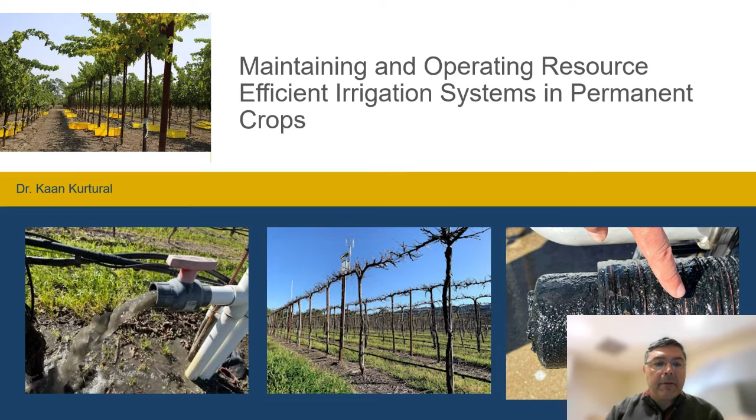Morning. Today I wanted to talk a little bit about maintaining and operating resource efficient vineyards. It is a maintenance issue that's often overlooked, and it can provide a lot of savings to the grower as well as maintaining the yields in any season.

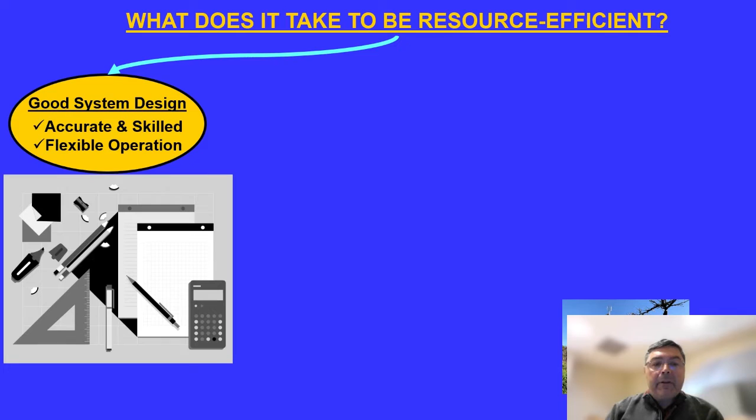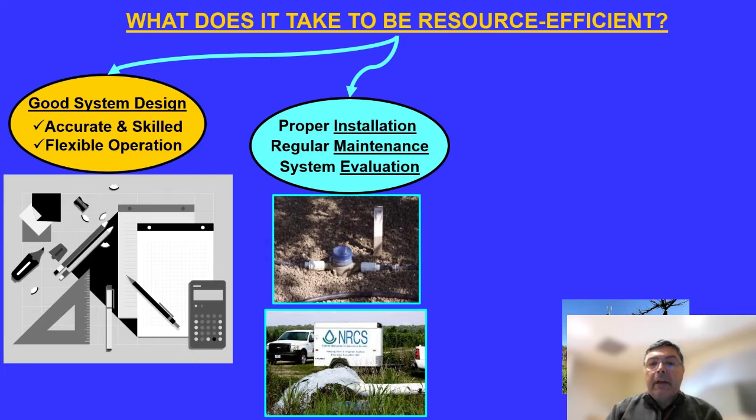So, what does it take to be resource efficient? It starts with a good system design, of course. You need an accurate and skilled person designing this system that will allow for a flexible operation. The system has to be properly installed, regularly maintained and evaluated.

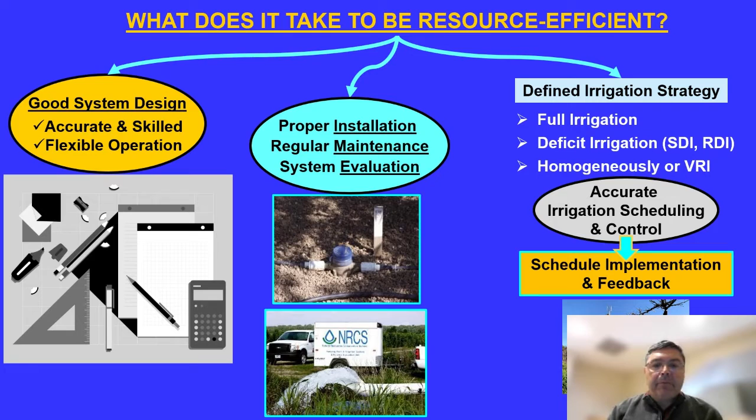You also need input from the grower regarding irrigation strategy, such as deciding to do full replacement or deficit irrigation, sustained deficit or regulated deficit, or irrigating the vineyard or orchard homogeneously versus using variable rate irrigation. This requires accurate irrigation scheduling and control, with schedule and implementation feedback, which we can explain at a later date.

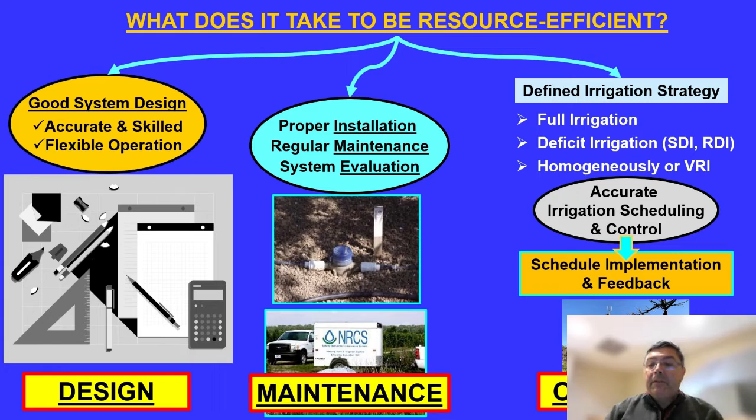So you have to have these components together: design, maintenance, as well as operations in our case.

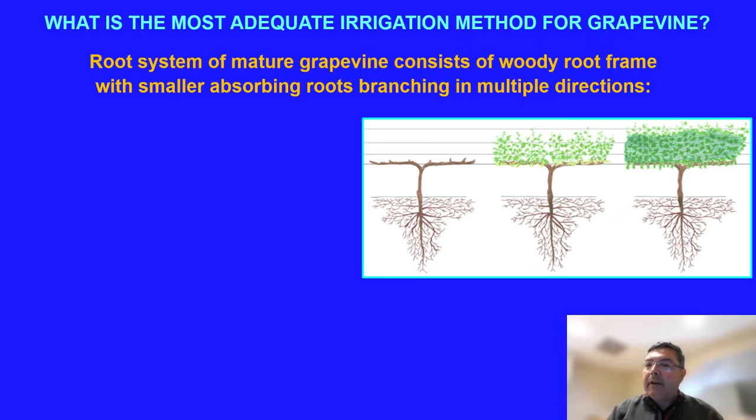So, what is the most adequate irrigation method for the grapevine, since that's mostly what I work with? You have to irrigate the vine by delivering water to the ground. The root system of the mature grapevine consists of a woody root frame with smaller absorbing roots branching in multiple directions, but rootstocks might affect that.

These roots will mine the soil horizontally and deeply. Vineyards thrive in soils with a good balance between water and air. We do not want saturated soils. Vineyards also do not enjoy soil compaction or wet-dry cycles.

We use low volume irrigation systems hand in hand with careful management and timing of amounts of irrigation and fertilizer.

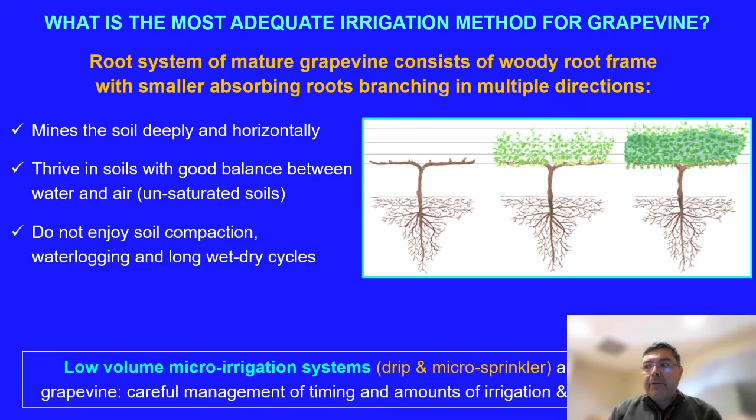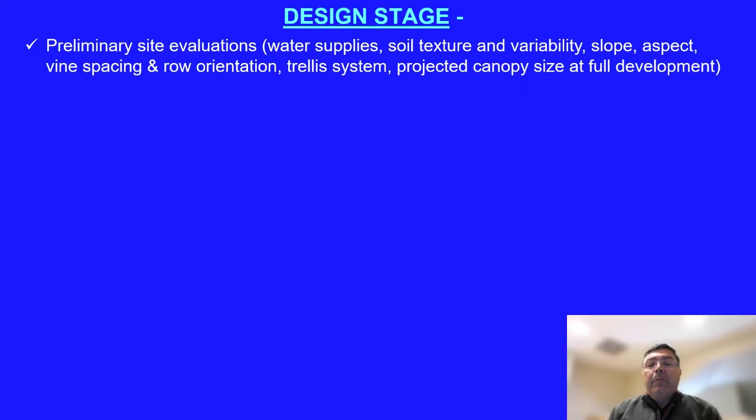Now, projected canopy size at full development, and what kind of water will you be delivering? Once you have these variables, you can define the water application rate in inches per hour and maximum irrigation depth in inches, based on soil properties such as infiltration rate and water holding capacity, and most importantly, crop evapotranspiration.

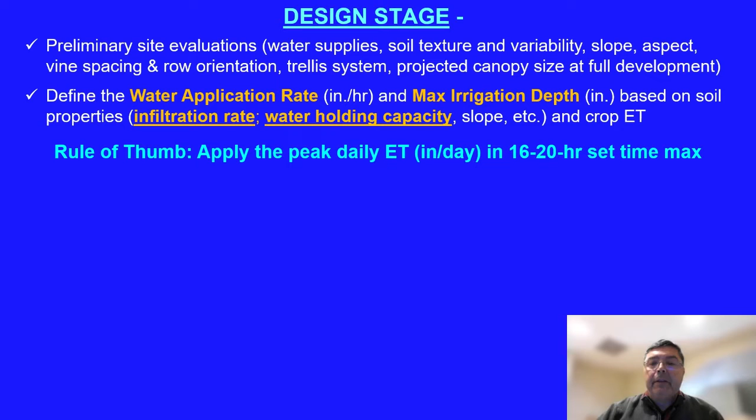The rule of thumb is to apply peak daily evapotranspiration, which is in inches per day, in a 16 to 20 hour set time maximum.

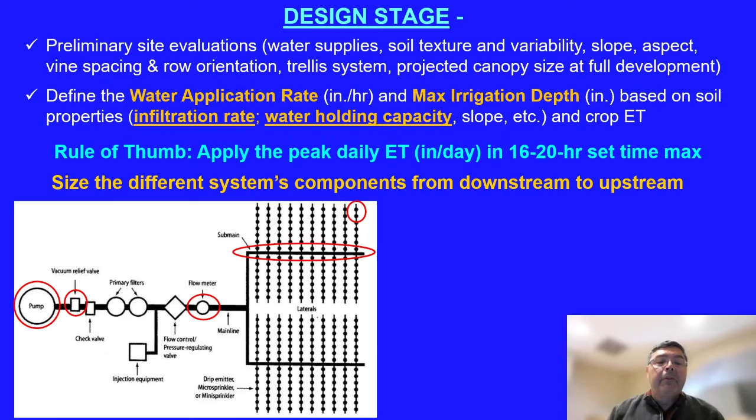We design these systems from downstream to upstream. For example, from the emitter by the vines to the submain, to the laterals, to the main line, flow meter, injection equipment, primary filters, and all the way back to the pump.

You also need to calculate the flow and friction losses along the pipe system, and size the various parts' capacity to ensure routine and maximum system load.

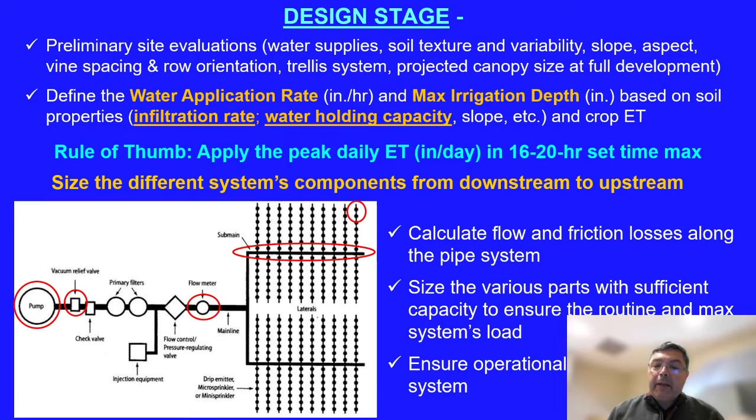You need to make sure you're able to irrigate this vineyard from the time you plant it to the time you're pulling a lot of yield. So you need to have some sort of flexibility in operating the system.

You will have a range of operating conditions, and you need to be able to adjust the operation to various system loads. During its lifetime, it will be operated under different conditions. Young vines are quite different, and these needs will increase with time, along with the quantity and pressure required.

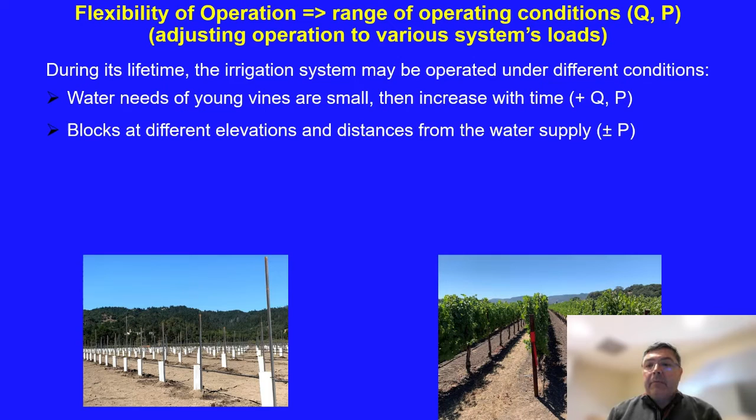You might also have different elevations and distances from the water supply, so you need to be able to vary the pressure delivered to different portions of your vineyard, and blocks with different emitters. There might be soil differences, so the quantity delivered to every block might differ, as well as the pressure.

More often than not, we see different composite systems with different flow rates and pressures. Sometimes people have drip and micro sprinklers in blocks right next to each other. You might have single lines or dual lines, alternating versus solid irrigation sets, etc. All these things factor into the flexibility of operations of an irrigation system in a vineyard.

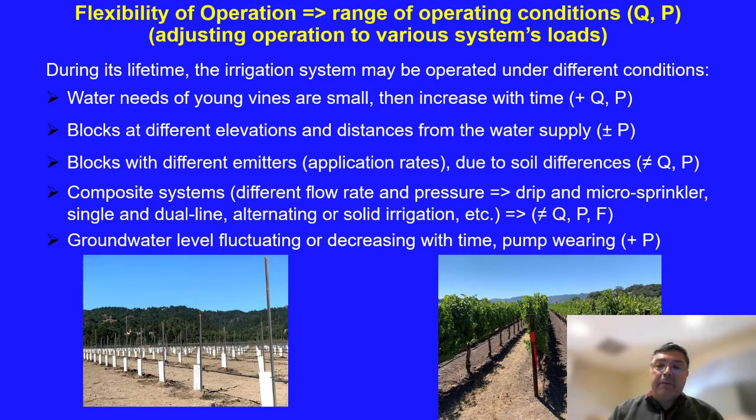Nobody's immune to it. Groundwater levels fluctuate and they might decrease with time. And as these deplete, the pumps start wearing out, so the pressure of the system has to be managed, or the pump needs to be maintained.

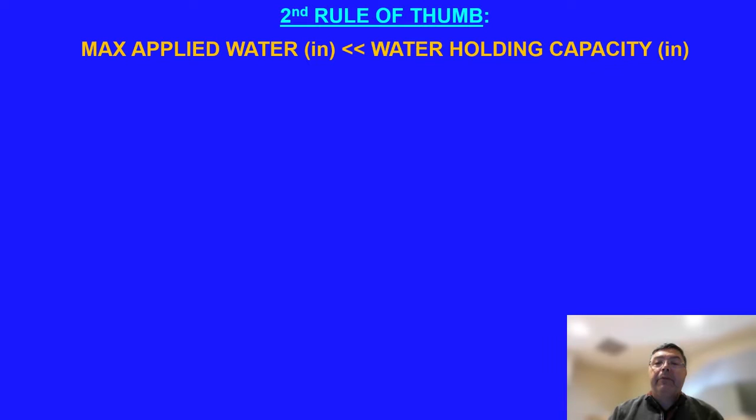The second rule of thumb when setting up these irrigation systems for resource efficiency: the maximum amount of water you apply in inches has to be less than the water holding capacity of the soil. Although with micro irrigation, we might be tempted to micro flood these vineyards.

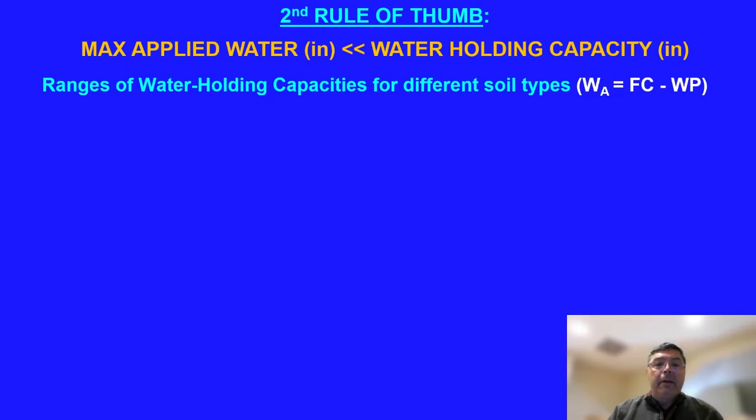Be careful or cognizant of the water holding capacities for different soil types. Usually this is the difference between the field capacity and the wilting point that we might set for these different soil types. Here's an idealized table of water holding capacities in inches per foot.

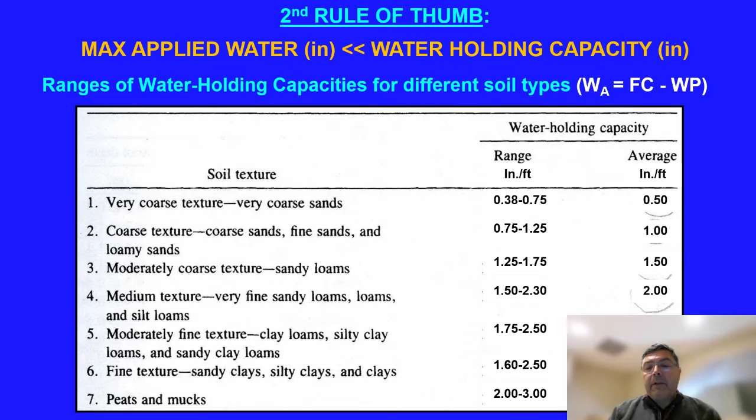You can go from very coarse sands to peat mucks. Most of our vineyards are in medium texture to moderately coarse texture soils, so our average water holding capacity is going to be about 1.5 to 2 inches per foot.

One thing I must point out is that soil electrical conductivity, which can be measured proximally, is directly related to texture and water content, and you can relate this spatially over large acreages. This work we did years back identified that water content measured with proximal sensing over long distances and areas really reflects the texture of the soils.

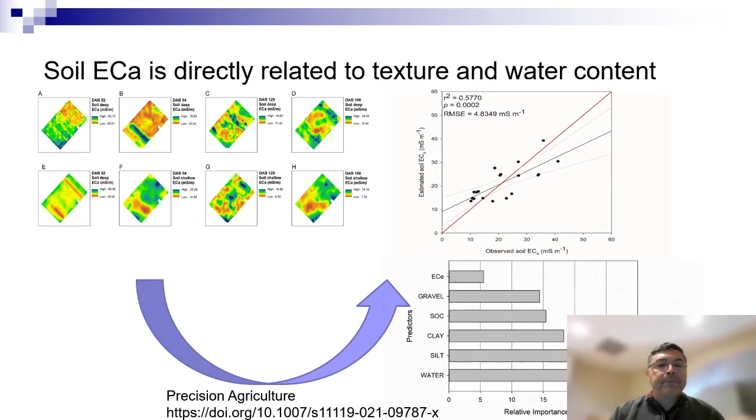After that you need to calculate some kind of maximum water depth for your irrigation. This is usually based on evapotranspiration. Different systems of irrigation can be put up: surface irrigation, sprinkler, micro sprinkler, and finally drip irrigation.

The efficiency of irrigation varies between 85 to 95%. When calculating maximum water depth of irrigation, we usually take the maximum daily ET multiplied by irrigation frequency and divide by the efficiency of application.

In this example, we looked at a 3-day period where we had roughly about 0.6 inches over the course of the 3 days, divided by the efficiency of 85%. This resulted in about 0.7 inches that has to be delivered in less than 24 hours in our specific case.

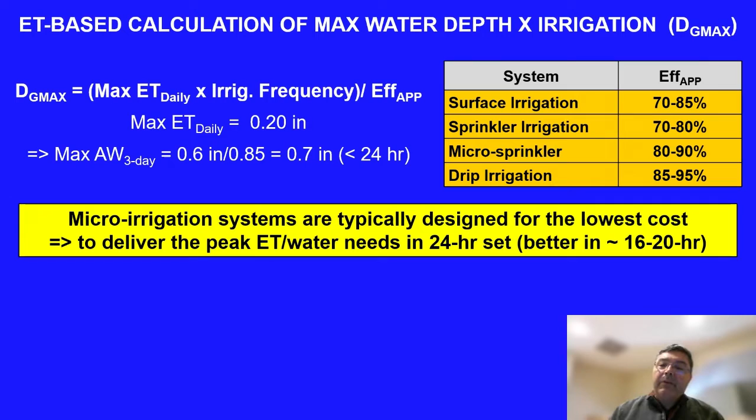Micro-irrigation systems, such as the systems we use in our vineyards, are usually designed for the lowest cost, and at this lowest cost they have to deliver the peak evapotranspiration water needs in a 24-hour set. But it's better if the system can deliver this in a 16 to 20-hour set.

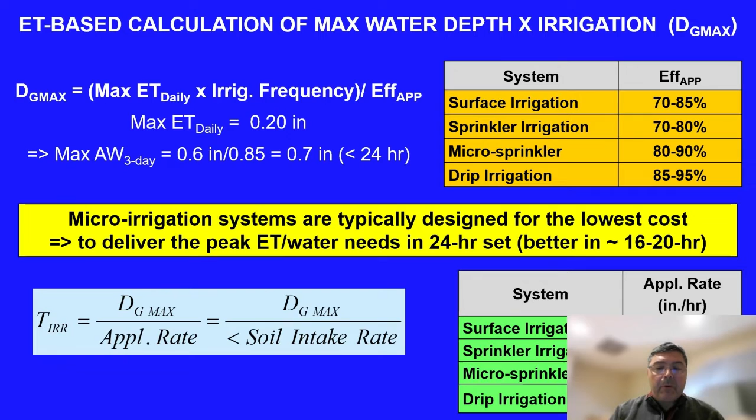Looking at this, you have different systems with different application rates in inches per hour. If you look at drip irrigation, they're delivering quite a low rate, so it can be a steady stream of water at a low rate coming into the vineyard.

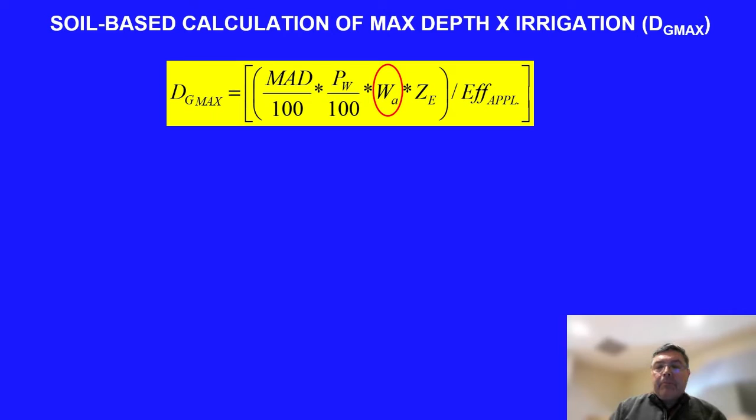So you have to match this to the soil-based calculation of maximum irrigation depth. The maximum depth of water to apply per irrigation is going to be related to the water holding capacity of the soil, the percent wetted area with the system you have in place, and the efficiency of application. The formula might look long, but it's quite straightforward.

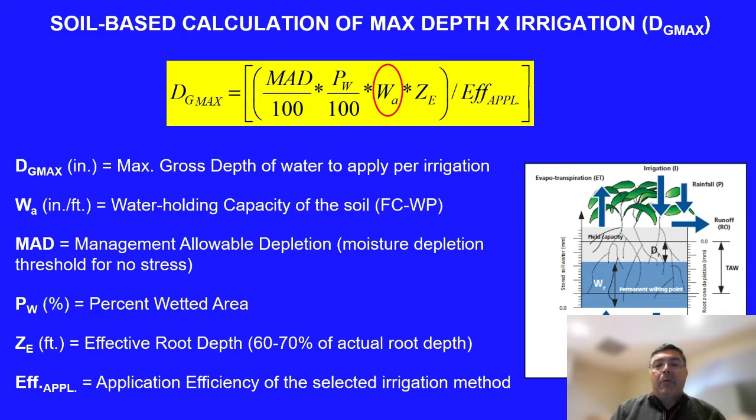Management allowable depletion for this type of soil, we set at 50%, so 0.8 inches per foot. Then the maximum irrigation depth to apply is calculated with the variables filled in, and you can also convert this to gallons per plant as a volume using the formula DG max multiplied by the spacing, 5 by 6, multiplied by the constant 0.623.

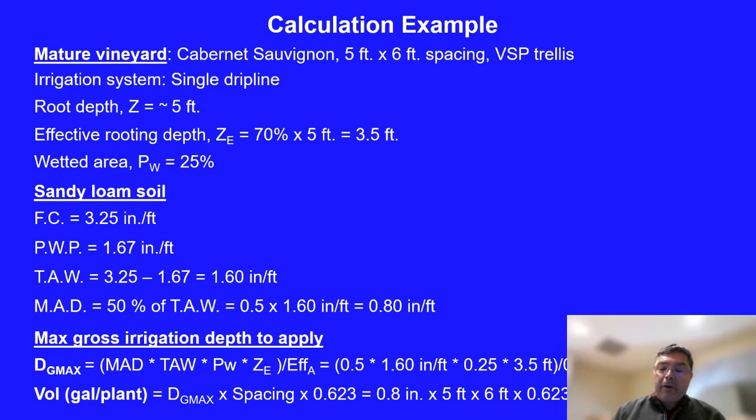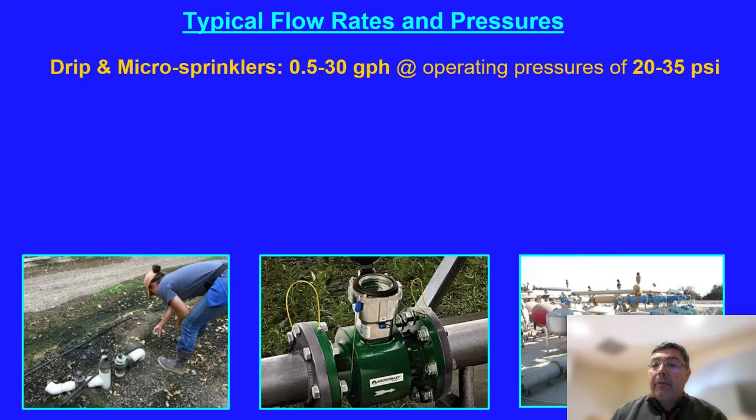When operating these systems, you have to be cognizant of the typical flow rates and pressures. Drip and micro sprinklers deliver anywhere between 0.5 to 30 gallons per hour, with operating pressures between 20 to 35 psi. Micro irrigation emitters might require 7 to 12 psi.

These are the emitters you have in the vineyards. Of course, any irrigation system will have a filtering system. Filters are a critical component of the irrigation system, and they will require an additional 15 to 25 psi. If you're using a back-flushing type filter, up to 35 psi for them to operate.

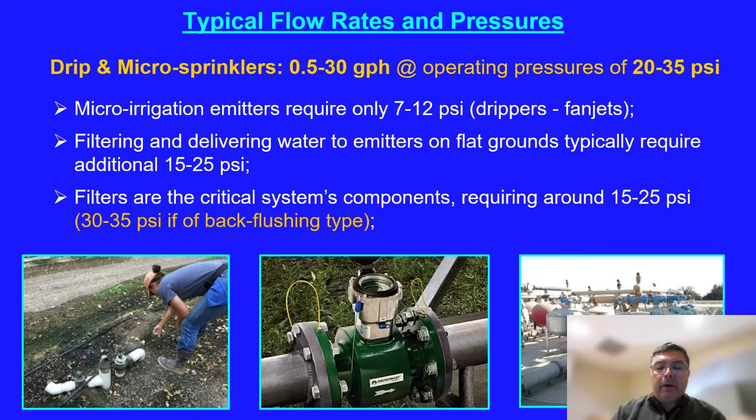As you will see here, the flow meter, pressure regulator, and I cannot emphasize enough the importance of having a flow meter at least at one point in the system.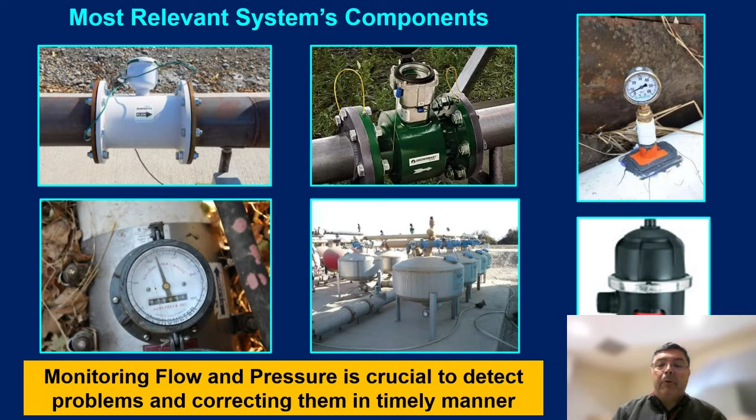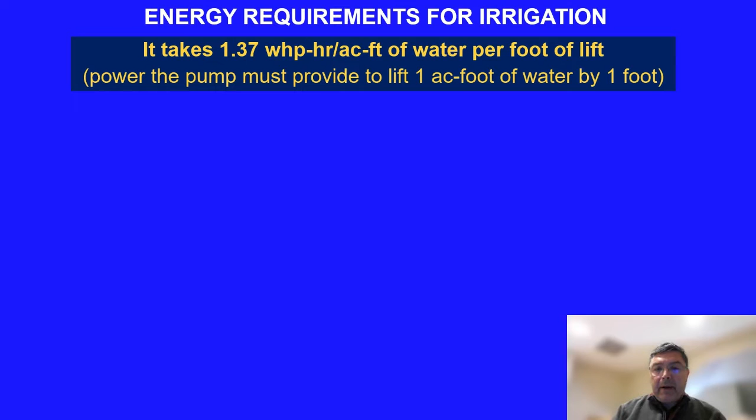There are energy requirements for irrigation. It'll take about 1.37 water horsepower hours per acre foot that the pump must provide to lift 1 acre foot of water by 1 foot. Various fuel sources, electricity, natural gas, diesel, and propane, and the pump output, they will have different energy requirements. The sources of energy also provide different energy units to lift the water. But electricity, it'll take about 1.55 kilowatt hours per acre foot per foot.

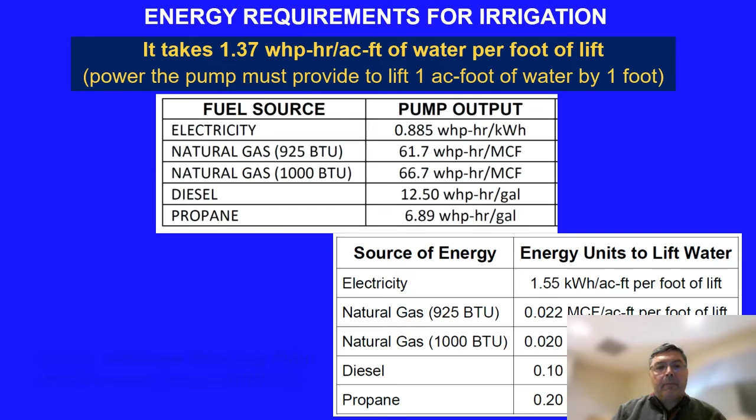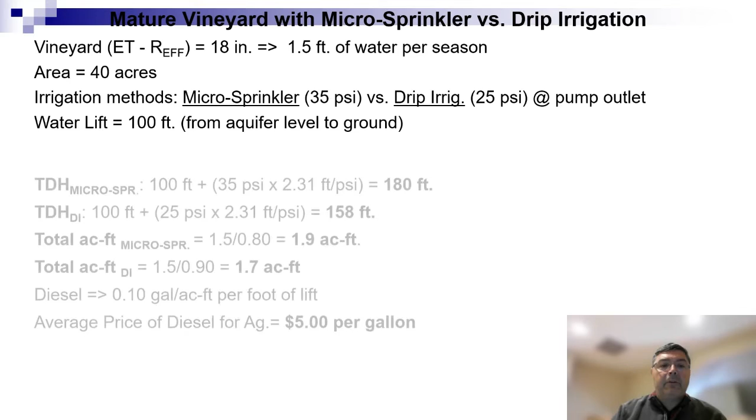A mature vineyard with a micro sprinkler versus drip irrigation. In this case, the vineyard was using about 1.5 foot of water per season on a 40-acre set. We compared irrigation methods of micro sprinkler versus drip irrigation, 35 versus 25 psi at the pump outlet. The water lifted 100 feet from aquifer level to ground. Looking at this, total dynamic head changes with micro sprinkler or drip irrigation. Micro sprinkler requires a higher psi compared to drip irrigation. Total dynamic head is 180 feet versus 158, with a micro sprinkler about 1.9 acre feet versus 1.7 acre feet with drip irrigation.

If you're using diesel to pump this water out, at 1/10 of a gallon per acre foot per foot of lift, assuming an average price of diesel at about $5 a gallon, it's quite substantial for a micro sprinkler. But if you were to change this to drip irrigation, because you're delivering a lesser amount of water with less dynamic head, the amount of cost that you're going to supply for diesel goes down quite a bit.

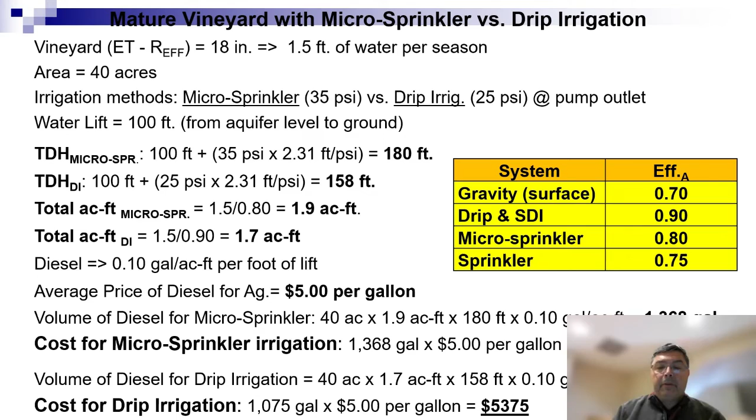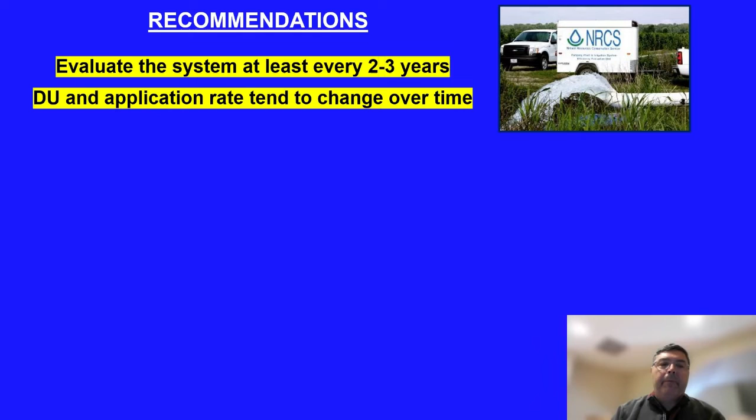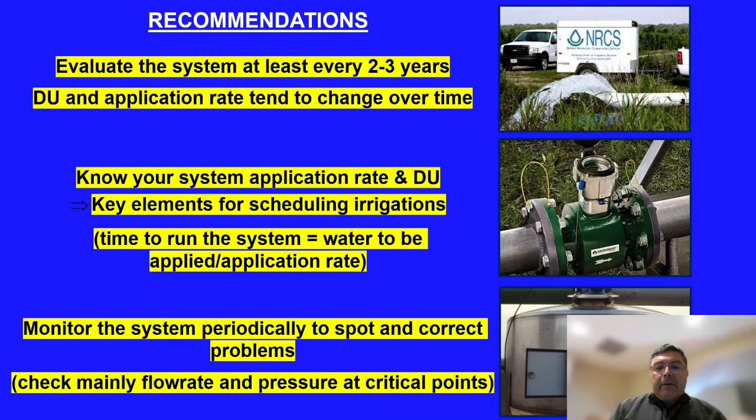Some recommendations: you need to evaluate the system at least every 2 to 3 years. Distribution uniformity and application rate changes over time. You need to know your system's application rate and distribution uniformity. These are key elements for scheduling irrigations. The time to run the system and water to be applied, the application rate, is a critical piece of information you need to have. The system needs to be monitored periodically to spot and correct problems. Check mainly the flow rate and pressure at critical points.

High system efficiency in vineyards, especially these days, requires significant efforts in routine maintenance. You need to check for leaks. Backflushing the filters is critical. You also need to periodically flush the main, sub-main, and laterals in that order. Chlorinating or cleaning for organic material, continuously at 1 to 2 parts per million, or periodically at 10 to 50 parts per million, ensures that you do not have growth. Sometimes acidifying the water is required to remove precipitates, and cleaning or replacing clogged emitters and other components.

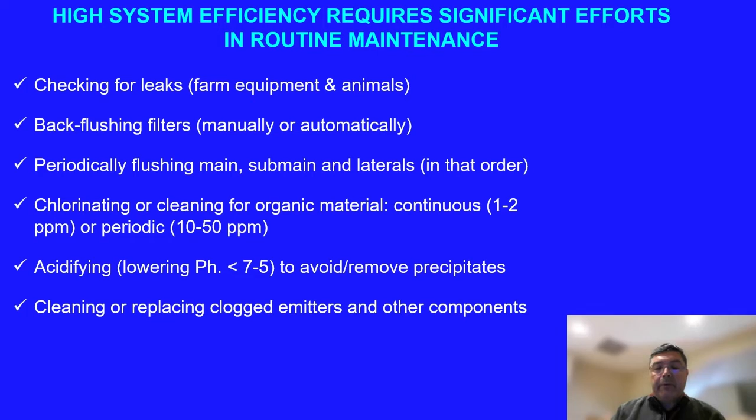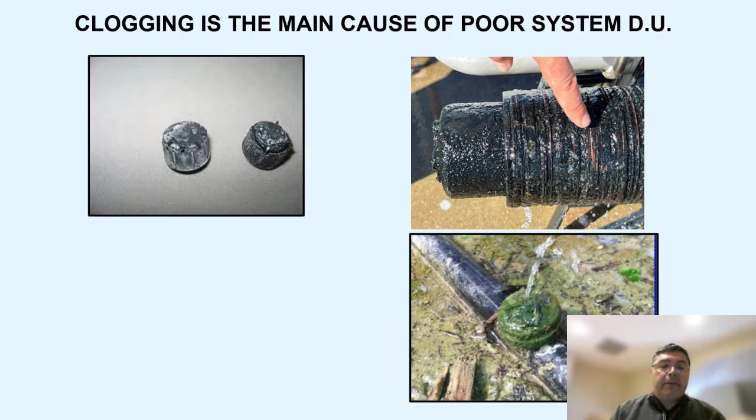Now, clogging is the main cause of poor system distribution uniformity. Emitter heads can get clogged. The filters themselves can get clogged, as well as the emitters themselves. This is usually due to suspended material in irrigation water, chemical precipitation at the emitters, biological growth, root intrusion, and soil ingestion causing this.

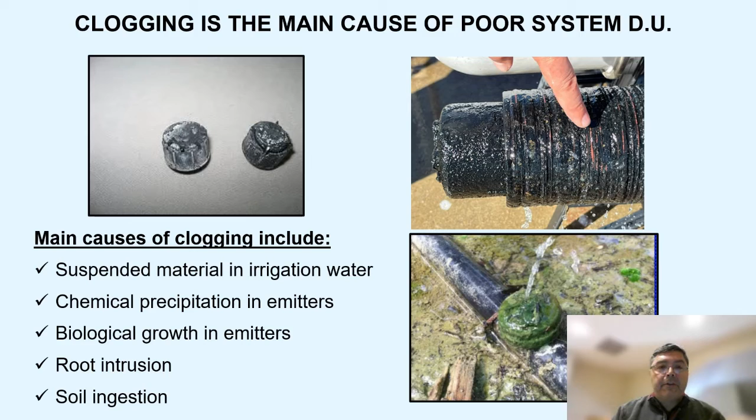Irrigation system evaluation has objectives. You need to calculate the average application rate in inches per hour, system distribution uniformity in percent, and identify the main problems and then correct them.

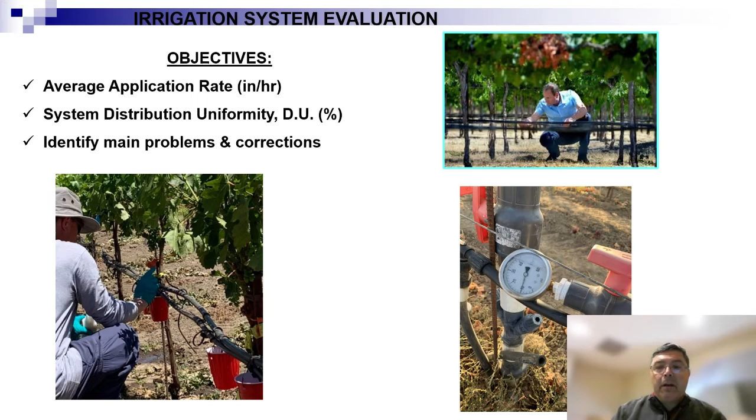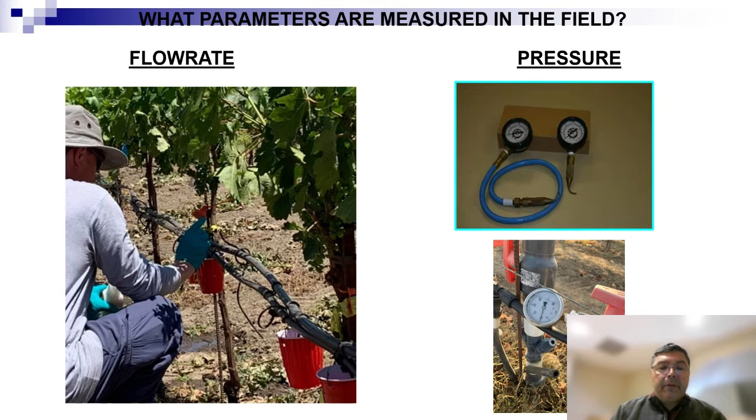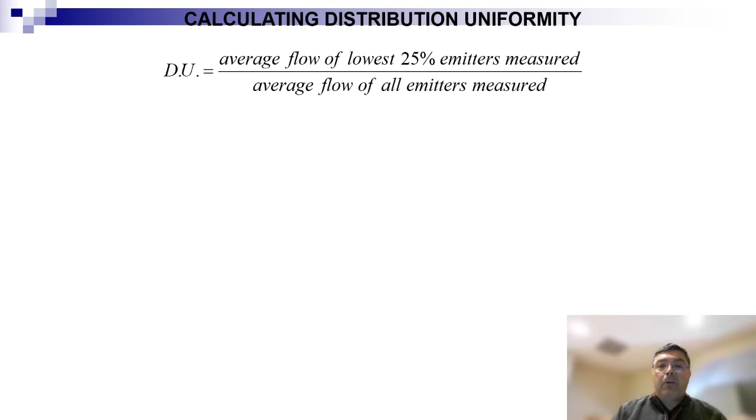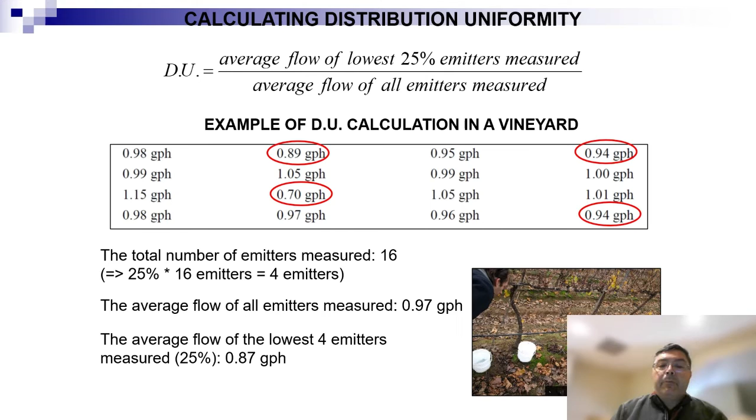Example of distribution uniformity calculation in a vineyard. Usually in a block, 16 to 20 emitters will be measured. You will pick the average flow of the lowest emitters. The average flow of all emitters measured was 0.97 gallons per hour, divided into the 25% of the lowest emitters measured at 0.87. Distribution uniformity in this case is 90%, which is pretty good.

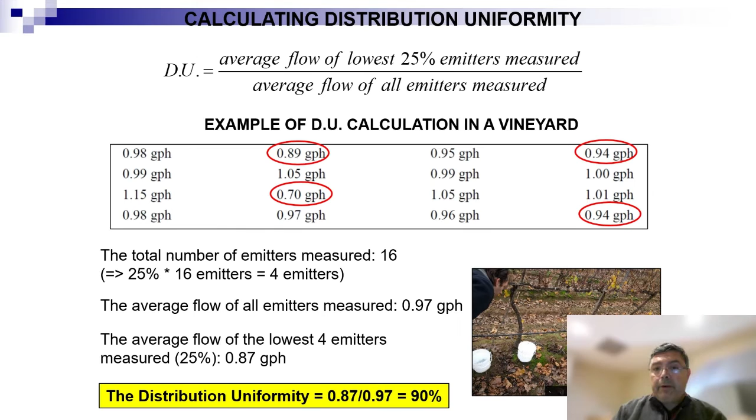The types of clogging manageable through chemical injection can be due to slimy bacteria, iron manganese oxides, iron manganese sulfides, calcium magnesium carbonates, and plant roots entering into the emitters. The action usually ends up clogging the emitters. The remediation can be chlorine injection, ozone, citric acid injection, and sometimes herbicides to kill the plant roots that have come into the emitters.

I'll show you an example of this, how we clean these and what it can mean to you in terms of dollars. Usually when you're injecting this cleaning material, an average pipe velocity of 1 foot per second is assumed, and then you inject it, and calculate the furthest distance, and how long you have to run this system for.

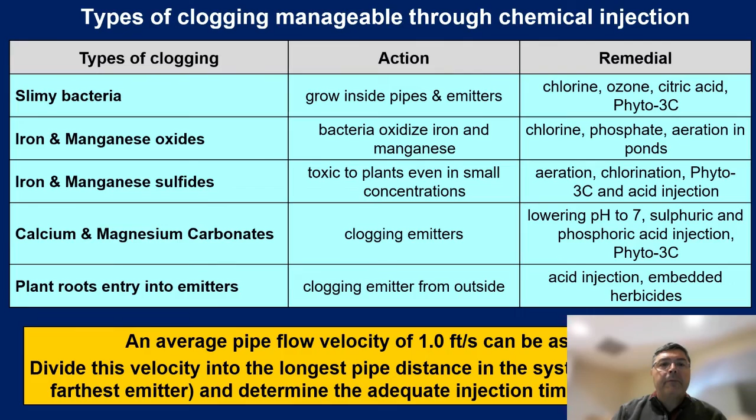We evaluated a cleaning product and an organic product for distribution uniformity. We looked at a vineyard that was just installed, with just a clean pipe. It was a Cabernet Sauvignon vineyard on a 110R rootstock. We identified distribution uniformity pre and post cleaning, and identified irrigation savings by fixing this distribution uniformity.

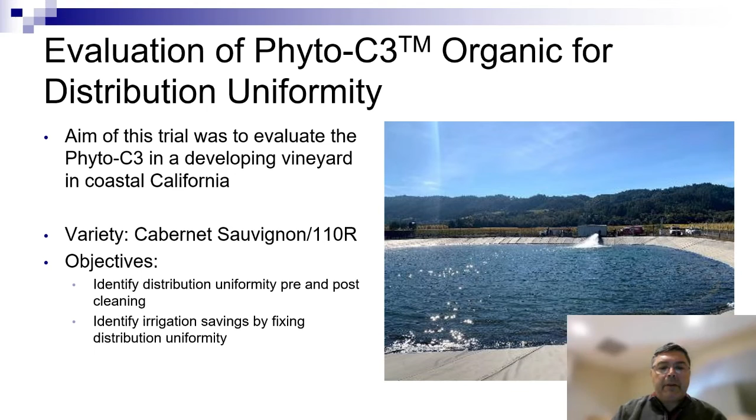This vineyard was irrigated with rainwater captured in a 21 acre-foot basin. In this case, our Berkeley pump was at that point at 65 gallons per minute, designed to deliver 30 psi at each manifold.

The irrigation system was a dual line hose. There were 4 half-gallon emitters per plant, and injection ports were at each manifold.

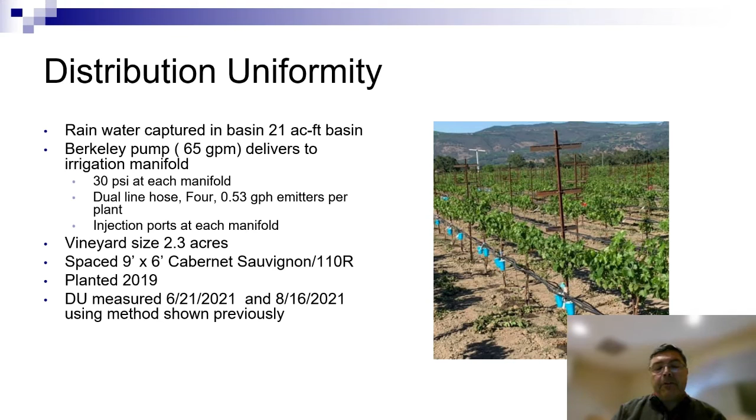Distribution uniformity was measured when irrigation started, and then it was cleaned up, constantly injected with a cleaning solution, and then it was measured again in mid-August using the methods shown previously.

Pre-cleaning, the pressure was around 22. Distribution uniformity was down to 0.7. It was 28, and distribution uniformity increased to 0.95.

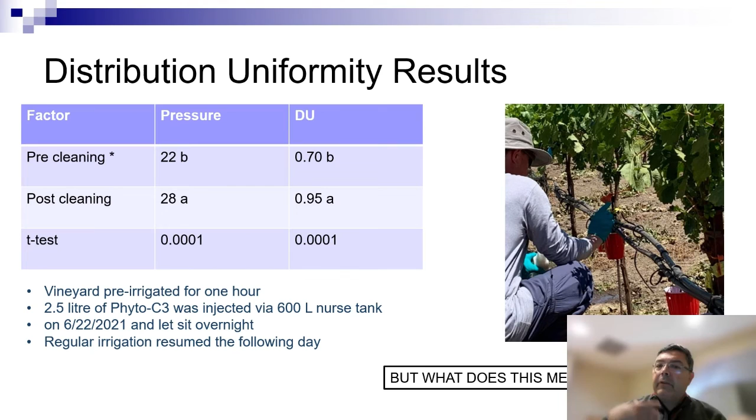The way it worked was: the vineyard was irrigated for 1 hour, 2.5 liters of the cleaning product was injected, set overnight, and regular irrigation followed the following day.

Uniformity is important because you can deliver the correct amount of water as well as the correct amount of fertilizer. In this day, with vine mealybug infestations we're seeing, you can also deliver the correct amount of insecticide. Of course, this results in less pumping time as well as less water drawn.

But we can put a value on this, and it's quite straightforward. I'll show you how to do this using this calculator.

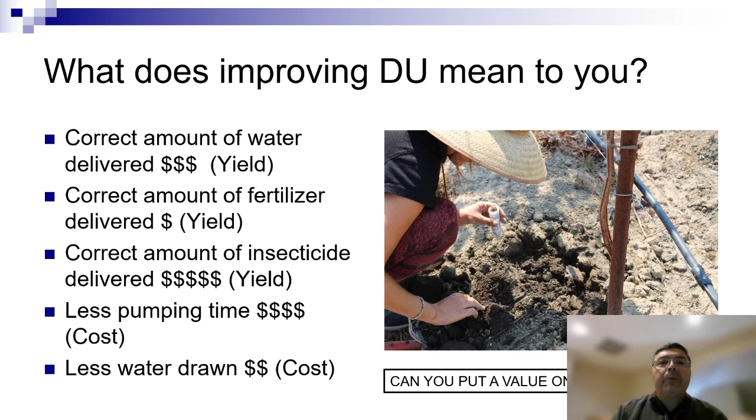The Excel calculator has some input data required from you, such as the surface area of the vineyard, spacing, emitter output, the elevation that the pump is drawing the water from, how far the water is traveling from the pump to the emitter, pump set point, and then head friction loss, which is in here as a formula.

Baseline conditions, as I mentioned, before cleaning, distribution uniformity was 0.7. Application rate was 0.494 gallons per hour.

Enhanced conditions after cleaning was 0.95 distribution uniformity. Application rate increased to 0.515, pressure head was 28. So these are the baseline and enhanced conditions, pre and post cleaning.

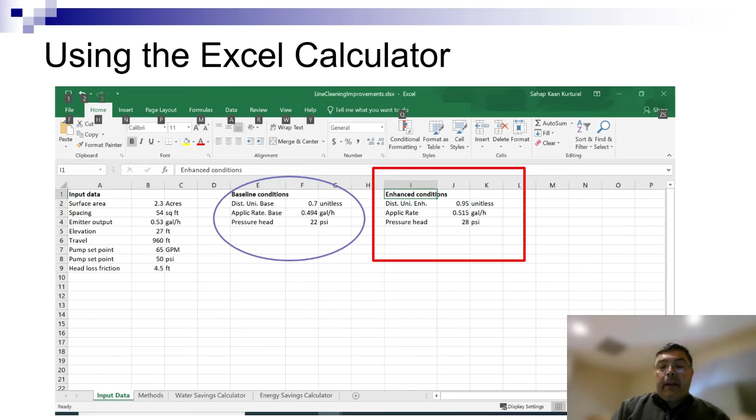You also need some other information. We measured the actual evapotranspiration in this vineyard using a surface renewal system, and got the season-long actual evaporation of 3 acre-inches per acre. Then the irrigation depth base, in this case, we can divide this by the base distribution uniformity to get the gross irrigation depth base.

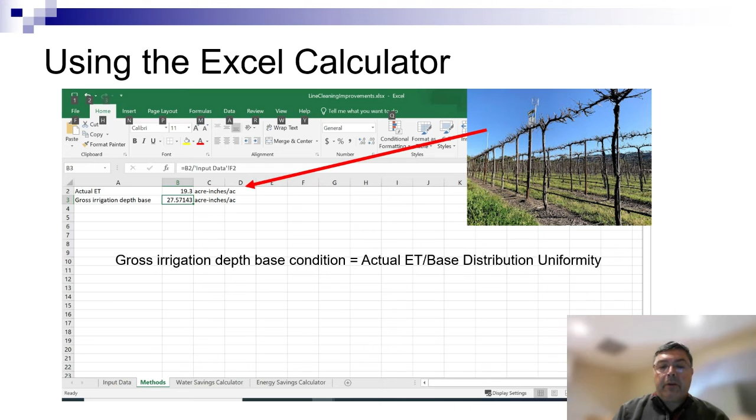Now, here's a water savings calculator. The actual ET was 19.3. Gross irrigation depth pre-cleaning would be 27 acre-inches per acre. Gross irrigation depth enhanced would be 20 acre-inches per acre after cleaning.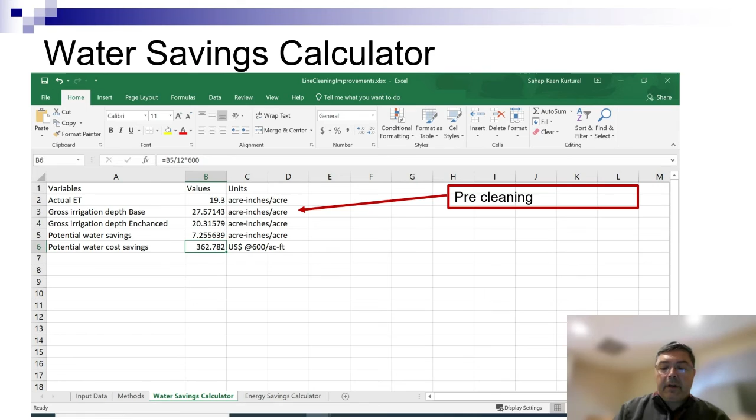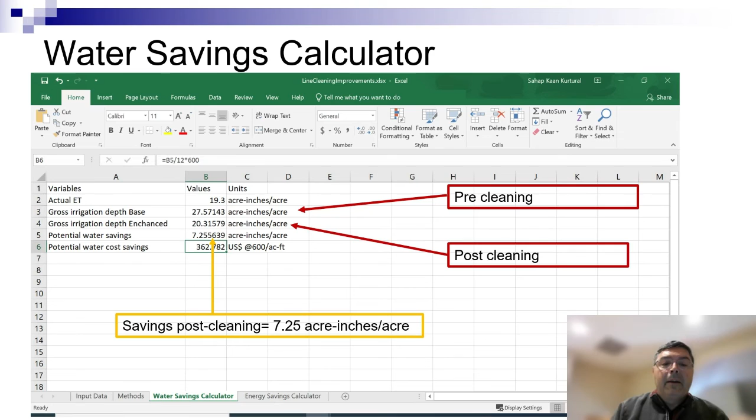This results in 7.25 acre-inches per acre of less water used. You don't have to pump as much water. Potential water cost savings, assuming $600 per acre-foot of water, is roughly around $362 per acre.

We were pumping this with an electric pump. Estimated energy use is, of course, going to depend on the total dynamic head. In this case, it was 142.5 feet. We were drawing it from 27 feet, 50 psi.

The energy use prior to cleaning would have been 507 kilowatt hours per acre. After cleaning, it would be 373 kilowatt hours per acre. Those are substantial savings. I don't know too many people that are just irrigating 1 acre. In this case, it's 133 kilowatt hours per acre.

You can also convert greenhouse gas emission savings, how much less carbon you're emitting because you're pumping less water.

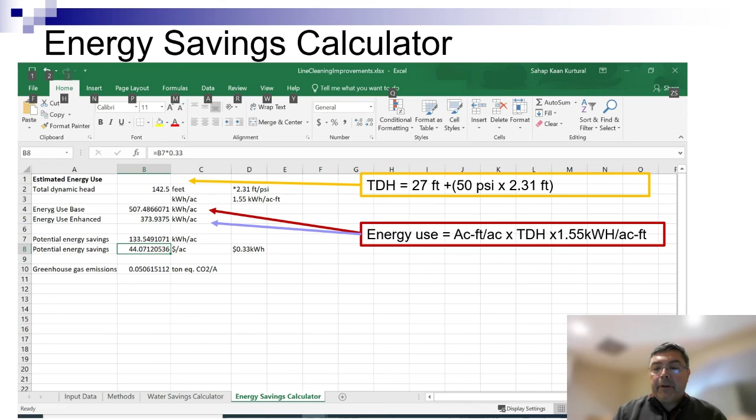Cleaning the system, then dosing at roughly 2 parts per million at each irrigation certainly helps. The cost of cleaning solution is not that much compared to pumping with a lot of electricity. Less pumping time results in energy savings as well as less water pumped.

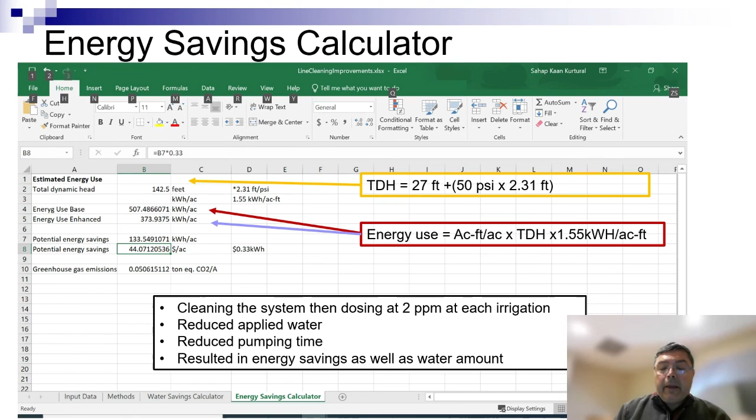System maintenance in micro irrigated systems is a must. You can maintain these systems close to design specifications if you follow a good schedule. This will result in applying the correct water and mineral nutrients, less pump hours, less energy cost, and less greenhouse gas emitted, which can help you apply for grants in this case.

Dosing with cleaning products can result in an increase in berry mass compared to no application of our cleaning product. This, of course, will result in an increased cluster mass compared to no cleaning product. And of course, you're going to get the correct yield because you're applying the correct amount.

We have not seen any adverse effects in primary metabolites or any of the secondary metabolites using this approach, because the system is operating as it should.